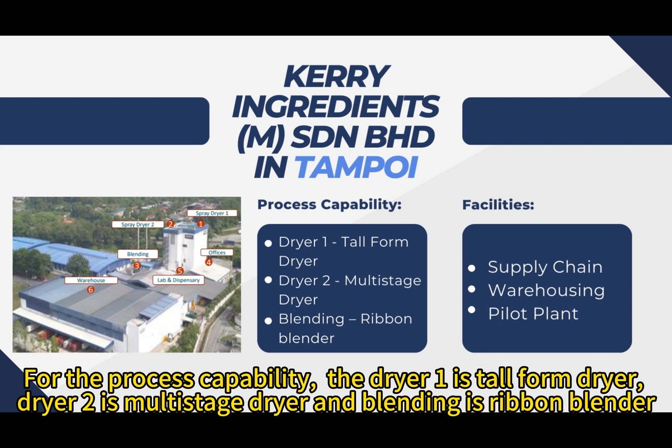For Kerry Ingredients M Sendirian Berhad in Tampoi, there are mainly 6 buildings in this plant: a 40-meter high building containing 2 spray dryers, blending area, offices, lab and dispensing area, and warehouse. For process capability, Dryer 1 is a tall form dryer, Dryer 2 is a multi-stage dryer, and the blender is a ribbon blender. The facilities include supply chain, warehousing, and pilot plants.

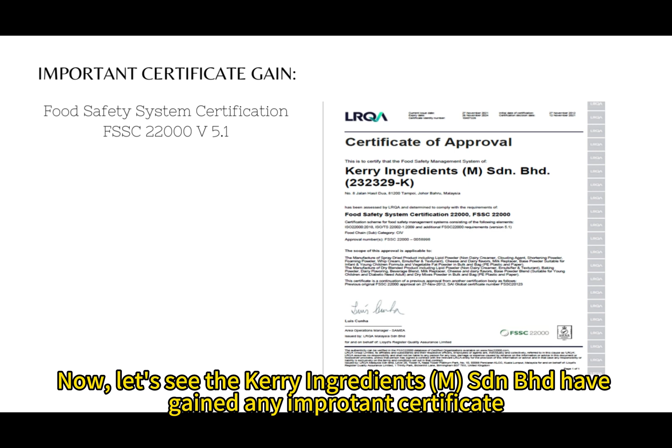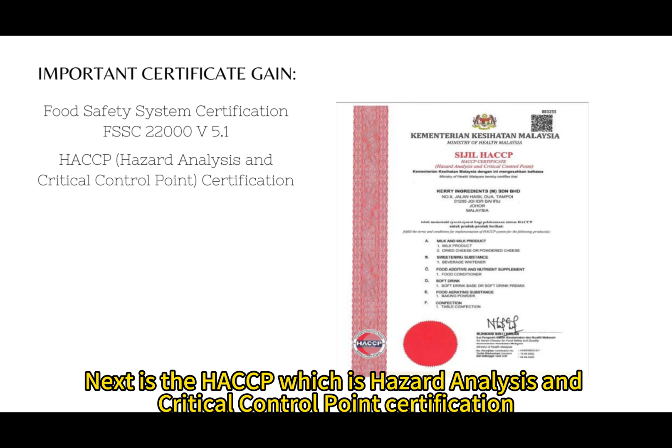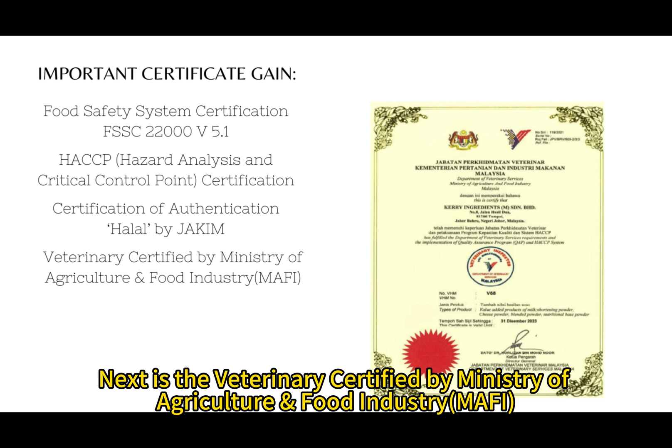Now, let's see what important certificates Kerry Ingredients M Sendirian Berhad has gained. The first is Food Safety System Certification, FSSC 22000 V5.1. Next is HACCP, the Hazard Analysis and Critical Control Point Certification. Third is the Certification of Authentication Halal by JAKIM. Next is the Veterinary Certified by the Ministry of Agriculture and Food Industry, MAFI.

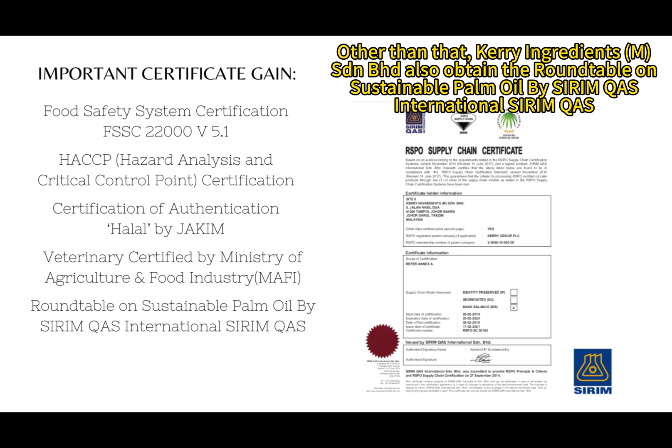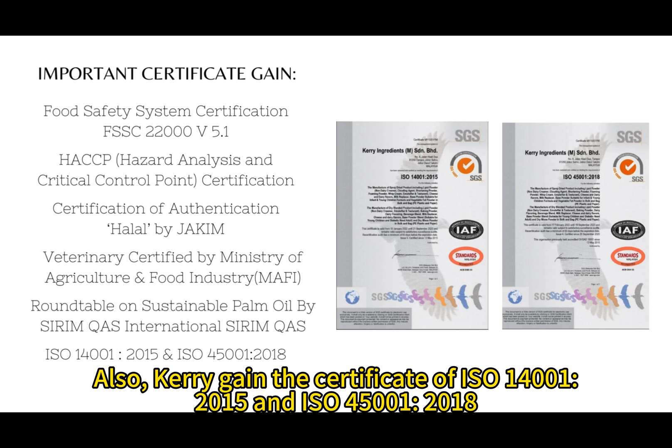Other than that, Kerry Ingredients M Sendirian Berhad also obtained the Round Table on Sustainable Palm Oil certification by SIRIM QAS International. Also, Kerry gained the certificates ISO 14001-2015 and ISO 45001-2018. These certificates are important in the manufacturing of spray dry and dry blended products.

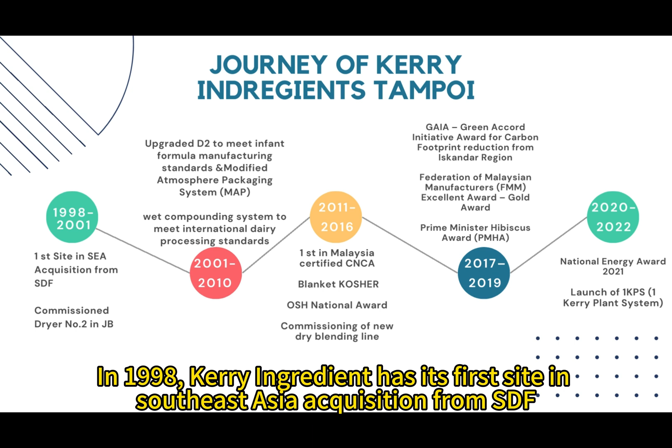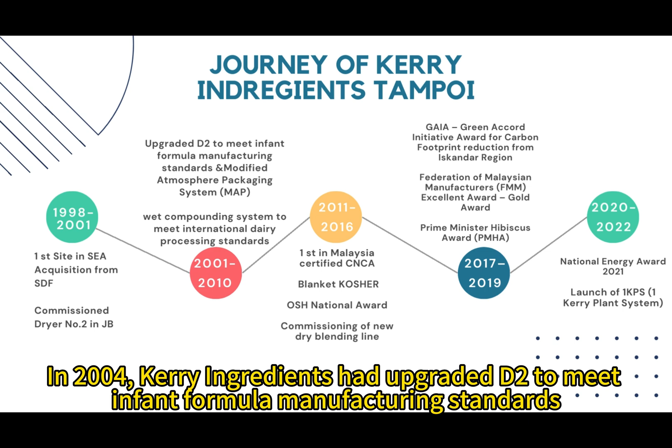So this is the key milestone for Kerry Ingredients. In 1998, Kerry Ingredients had its first site in Southeast Asia acquired from SDF. In 2001, they commissioned Dryer No. 2 in Johor Bahru. In 2004, Kerry Ingredients upgraded D2 to meet infant formula manufacturing standards, and added the Modified Atmosphere Packaging System (MAP) in 2010.

In 2008, they upgraded the wet compounding system to meet international dairy processing standards. In 2014, Kerry Ingredients was awarded the OSH National Award. In 2016, they commissioned a new dry blending line. In 2017, Kerry Ingredients was awarded the Prime Minister's Hibiscus Award (PMHA).

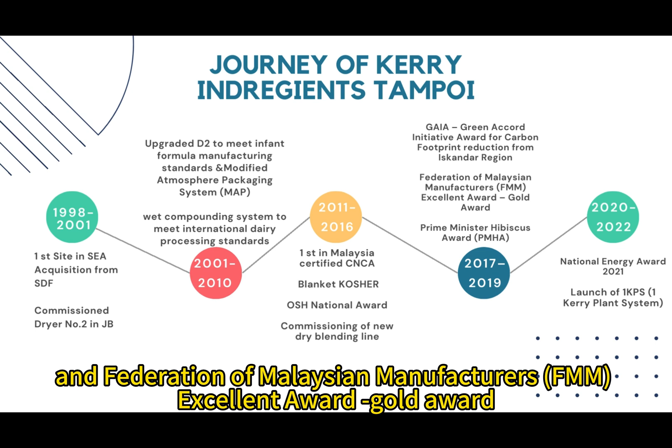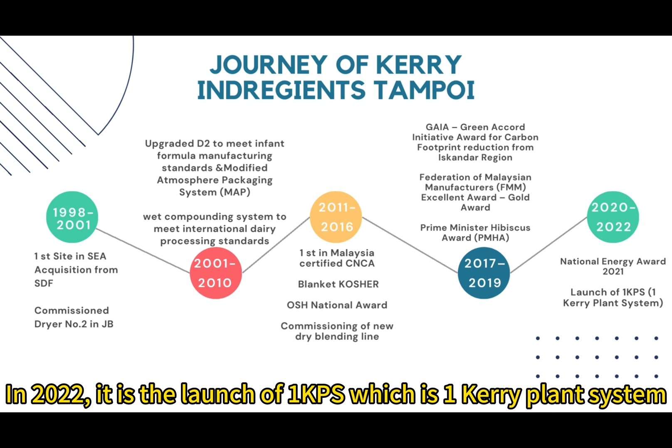In 2019, they were awarded the GAIA Green Accord Initiative Award for Carbon Footprint Reduction from the Iskandar Region, and the Federation of Malaysian Manufacturers (FMM) Excellent Award Gold Award. In 2021, they were awarded the National Energy Award 2021. In 2022, it is the launch of 1KPS, which is One Kerry Plant System.

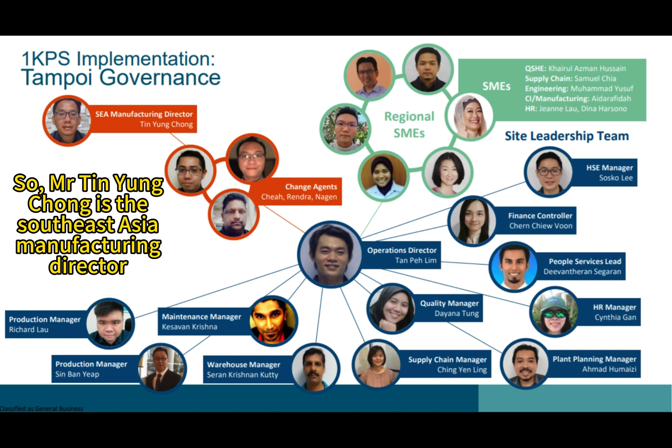Next, we have the One Kerry Plant System Implementation Tampoi Governance. Mr. Tin Yung Chong is the Southeast Asia Manufacturing Director, followed by change agents Cheah, Rendra, and Nagen. There are site leadership teams under the Operations Director, Mr. Tan Peh Lim. It also has the Regional Small and Medium Enterprises, SMEs.

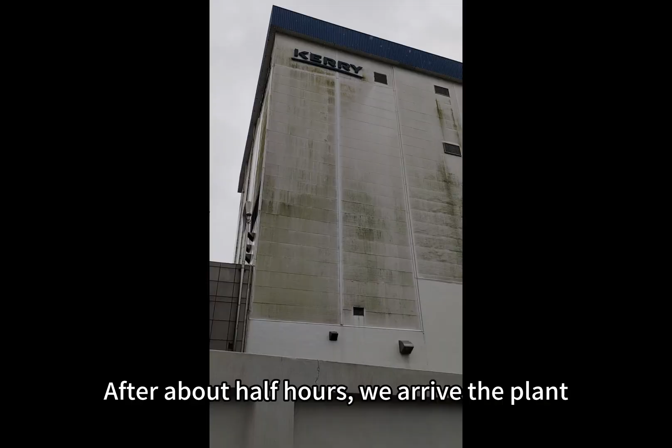In the morning, we gather at L01 and go to the plant by bus. After about half an hour, we arrive at the plant. Then we are brought to the guest room and listen to the explanation.

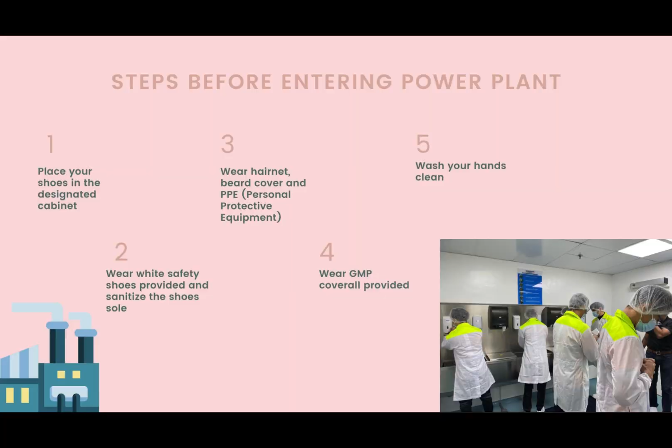The Health and Safety Executive Manager, Mr. Sosko Lee, gives us an explanation about the safety information in the plant. Then the Production Manager, Richard Lau, gives us a brief explanation about the plant. Then we are separated into a few groups.

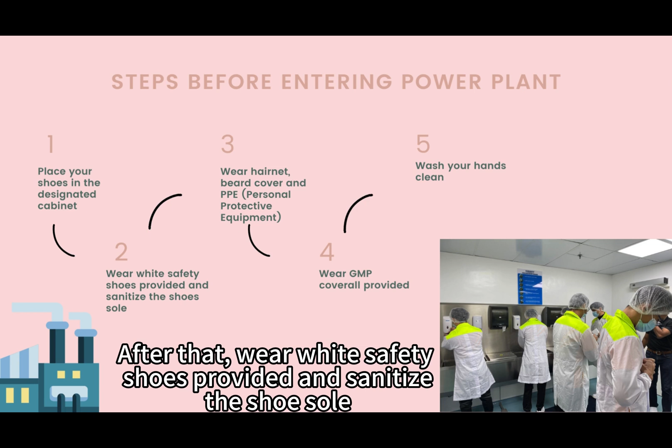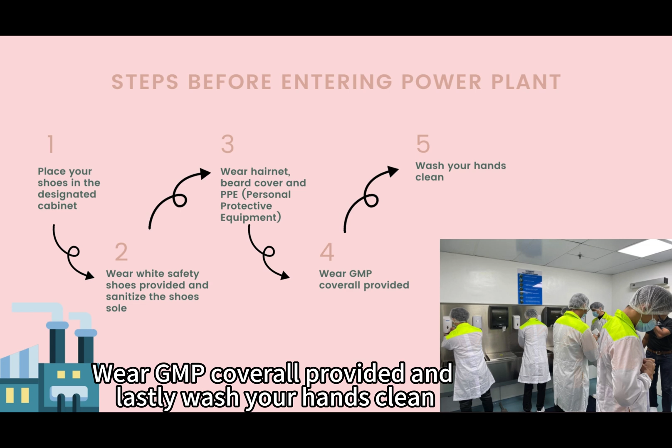There are a few steps before entering the plant. First of all, place your shoes in the designated cabinet. After that, wear the safety shoes provided and sanitize the shoe sole. Wear a hairnet, beard cover, and PPE. Wear the GMP coverall provided. And lastly, wash your hands clean.

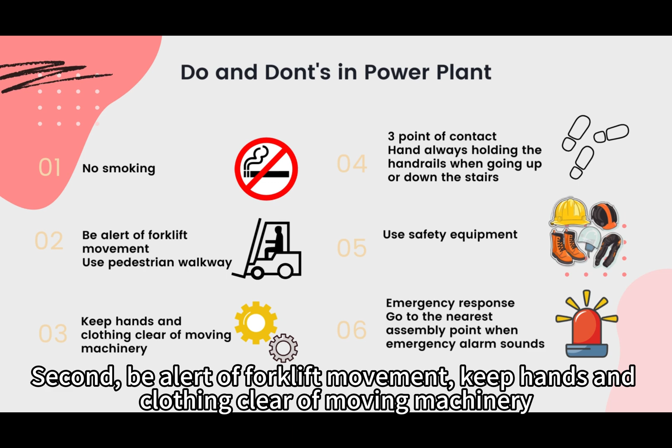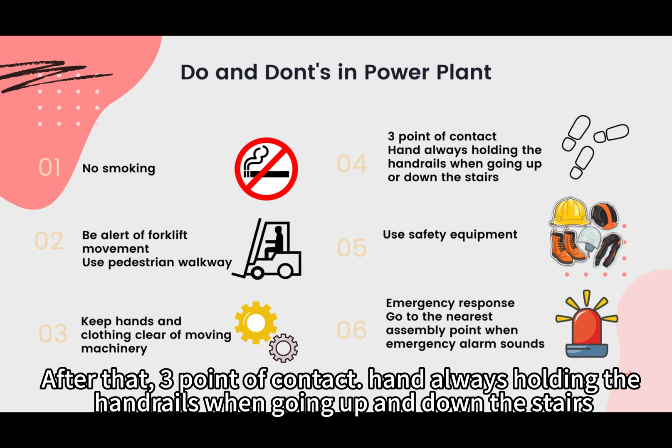After that, maintain 3 points of contact - hands always holding the handrails when going up and down the stairs. Use safety equipment. Lastly is emergency response: go to the nearest assembly point when the emergency alarm sounds.

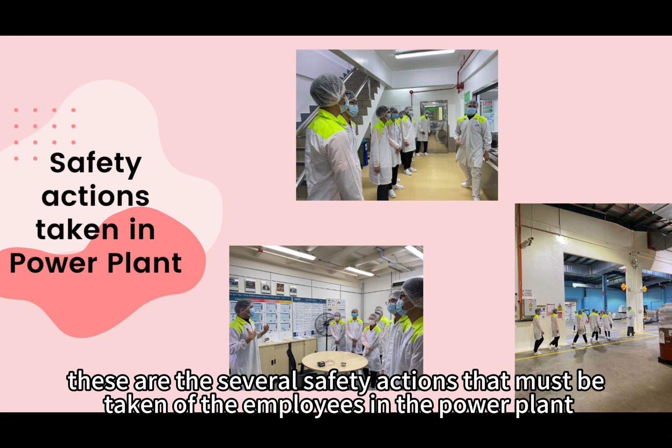Alright, so these are some photos taken in the plant, showing several safety actions that must be taken by employees in the plant. Next, we move on to the overview of the production process flow and products.

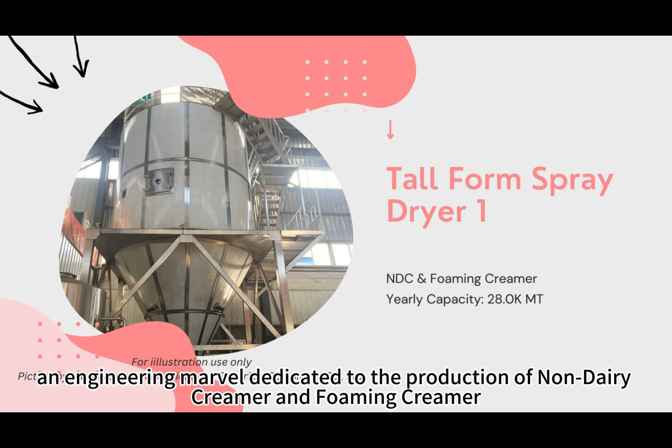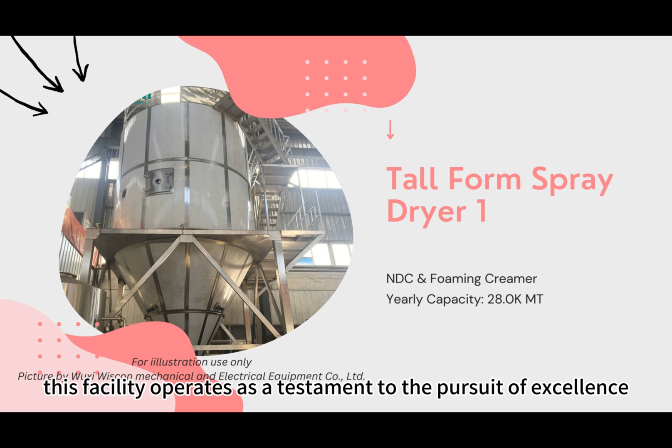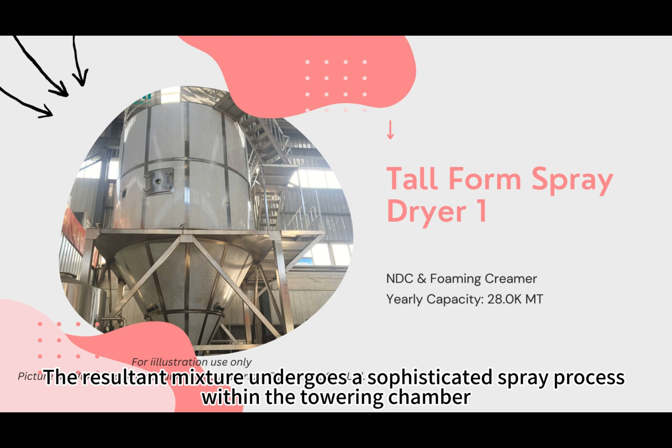Our exploration begins in the spray dryer plant, a realm of precision engineering and scientific mastery. Here we find the tall form spray dryer, an engineering marvel dedicated to the production of non-dairy creamers and foaming creamers. With an annual capacity of 28,000 metric tons, these facilities operate as a testament to the pursuit of excellence. The process commences with the meticulous selection and blending of specific ingredients. The resultant mixture undergoes a sophisticated spray process within the towering chamber, yielding fine powder particles. These methods ensure unparalleled quality and consistency across our product range.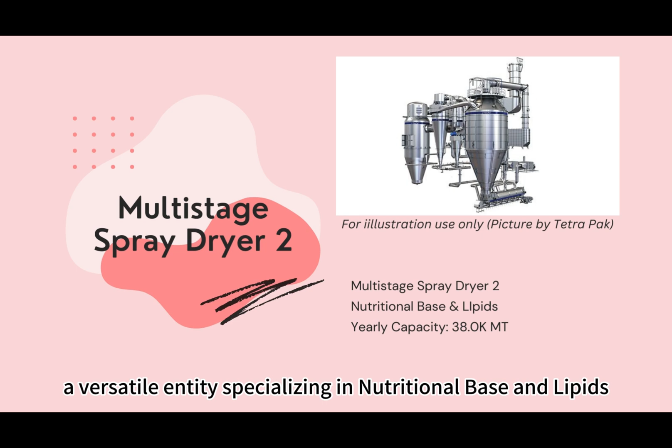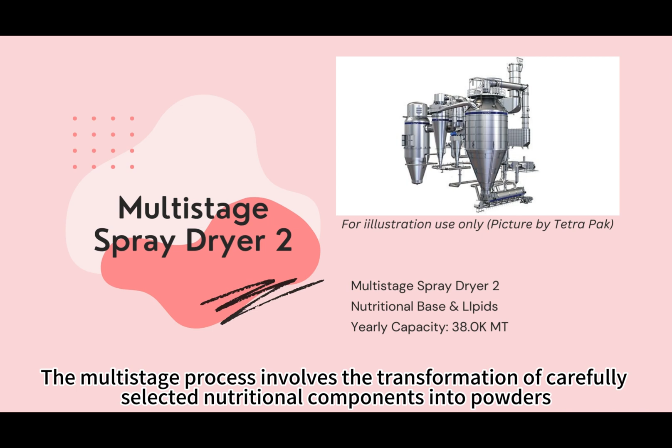Progressing further, we encounter the multi-stage spray dryer two, a versatile entity specializing in nutritional base and lipids. Boasting a yearly capacity of 38,000 metric tons, it stands as a cornerstone in our commitment to delivering nutritionally superior ingredients. The multi-stage process involves the transformation of carefully selected nutritional components into powders, serving as the foundation for a diverse array of applications ranging from health supplements to fortified food products.

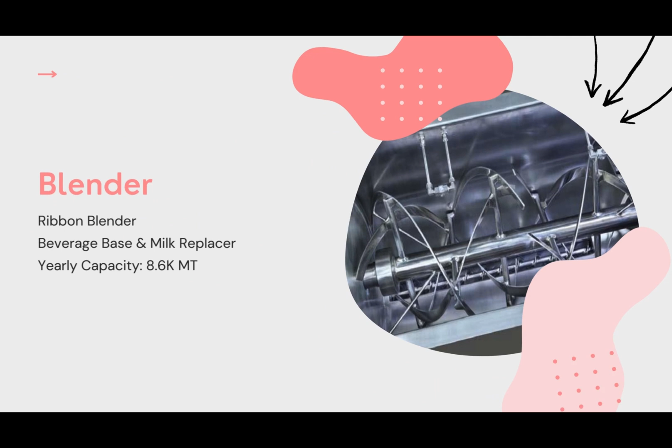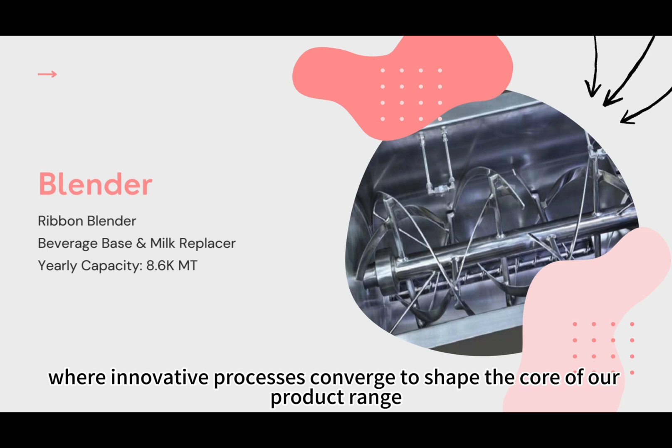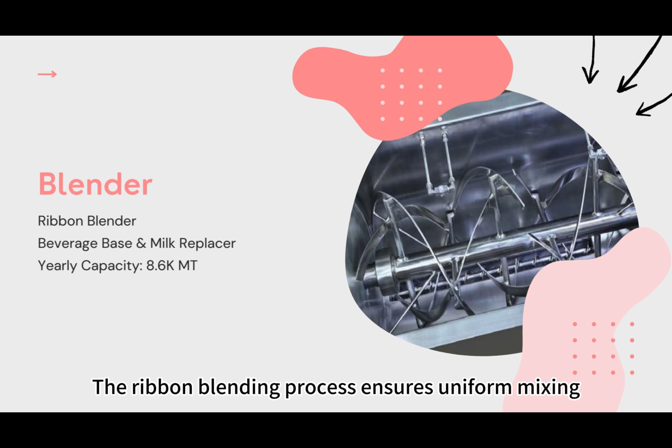Our education odyssey extends to the blender plants, where innovative processes converge to shape the core of our product range. Here, the ribbon blender takes center stage, orchestrating the harmonious blend of beverage bases and milk replacers. With an annual capacity of 8,600 metric tons, these facilities epitomize precision in formulation. The ribbon blending process ensures uniform mixing, producing a homogeneous blend that serves as the cornerstone for a diverse range of beverage and dairy products.

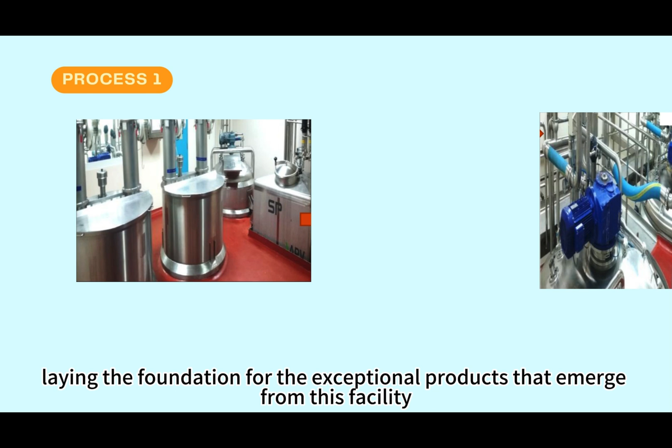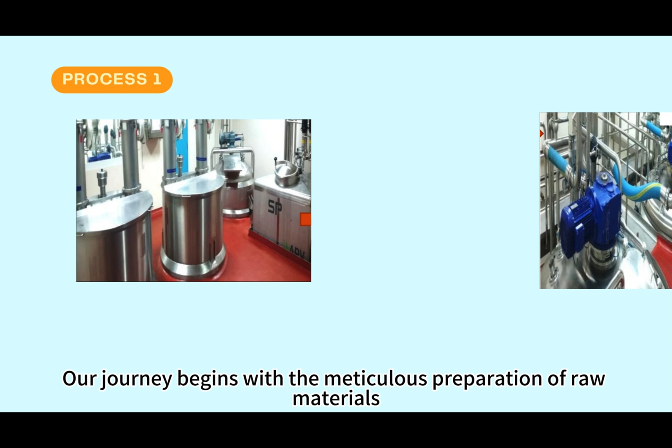In this segment, we dive into the intricate process of spray drying and carrier ingredients. These crucial methods transform liquid into fine powder, laying the foundation for the exceptional products that emerge from this facility. Process one begins with the meticulous preparation of raw materials. In the staging and dispensary areas, each ingredient undergoes thorough quality control verification to ensure the highest standards are maintained.

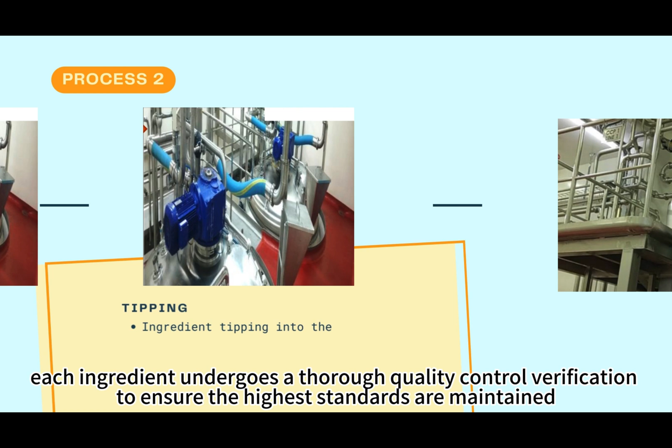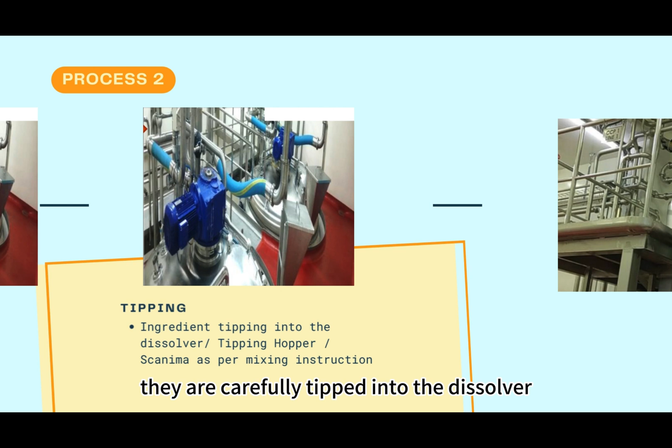Process two begins once the ingredients are meticulously measured and verified. They are carefully tipped into the dissolver, tipping hopper or Scanima, following precise mixing instructions.

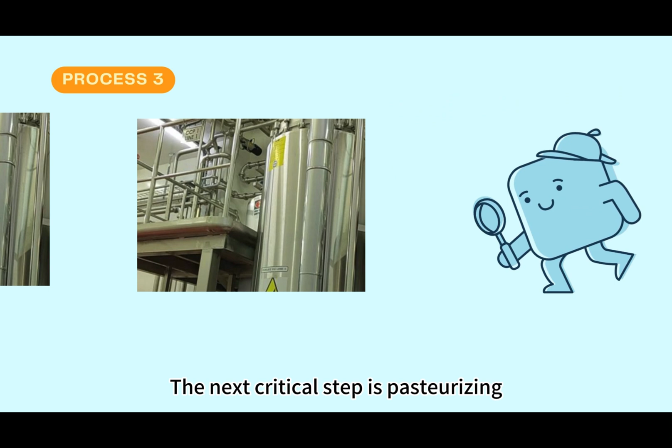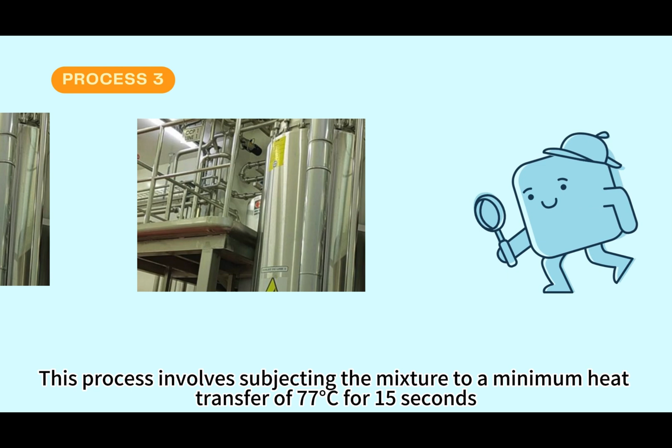Process three is pasteurizing, marked as critical control point 1. This process involves subjecting the mixture to a minimum heat transfer of 77 degrees Celsius for 15 seconds, ensuring the highest standard of hygiene and safety.

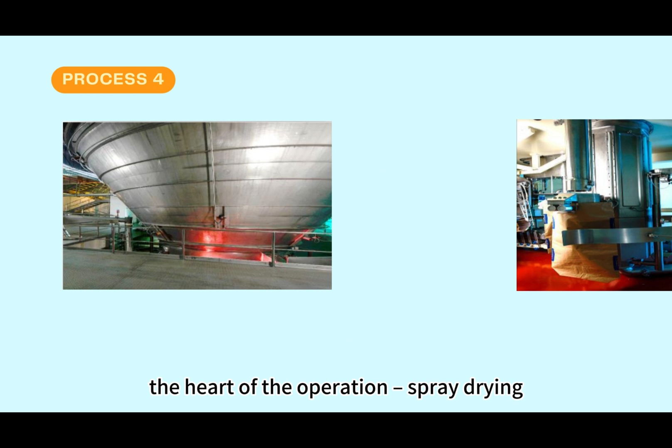Process four is the heart of the operation: spray drying. This process involves dewatering the mixture, transforming it from liquid form to fine powder that retains the essence of the original ingredients.

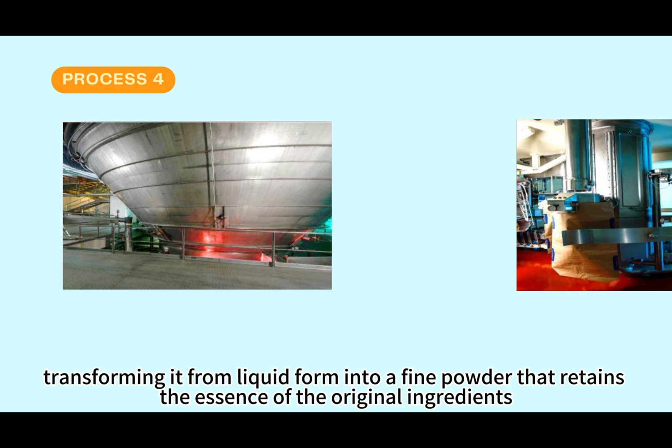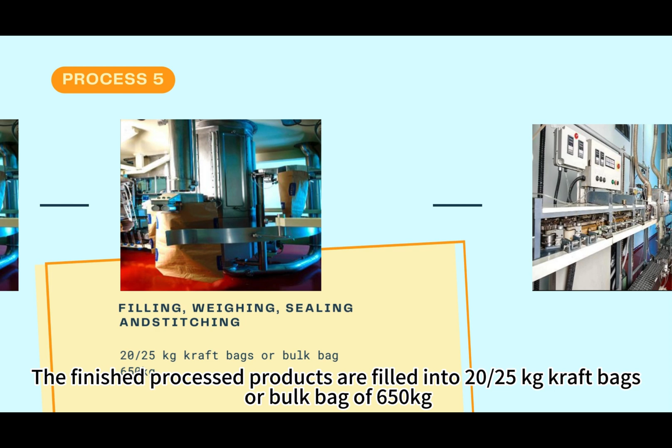Now let's go on to step 5, which is filling, weighing, sealing, and stitching. The finished processed products are filled into 20 or 25 kg kraft bags or bulk bags of 650 kg.

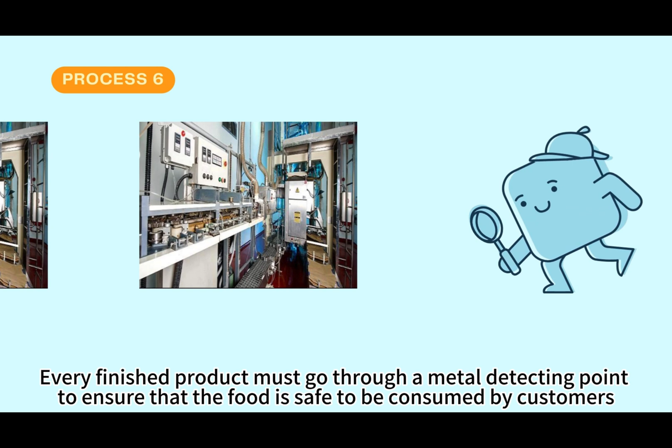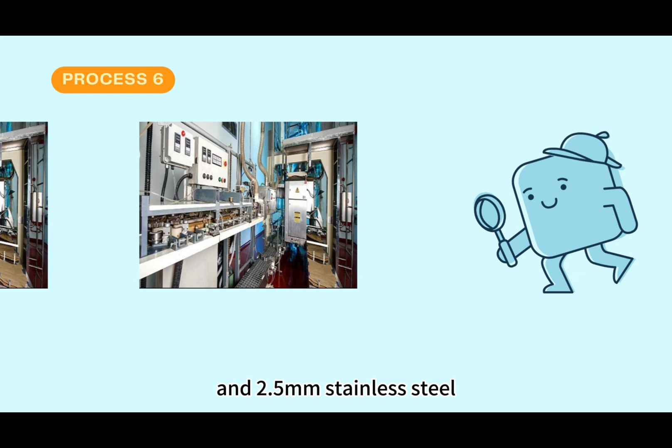This is a crucial part of the production line: metal detecting. Every finished product must go through a metal detecting point to ensure that the food is safe to be consumed by customers. The critical limit of a metal detector is 2 mm Fe, 2.5 mm non-Fe, and 2.5 mm stainless steel, with a secondary standard of 1.8 mm Fe, 2.5 mm non-Fe, and 2.5 mm stainless steel.

Next is weight check weighing. The weight of each item is checked to guarantee that the product produced is perfectly aligned with industry standards.

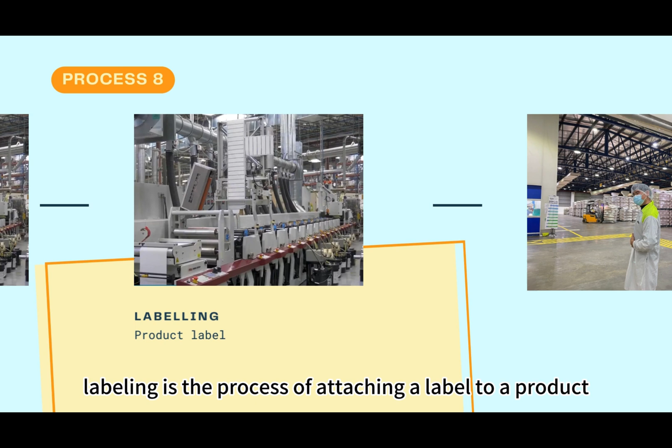Process 8 is labeling. Labeling is the process of attaching a label to a product, providing essential information about it, for example expiry date, ingredients, nutritional facts, and identification marks.

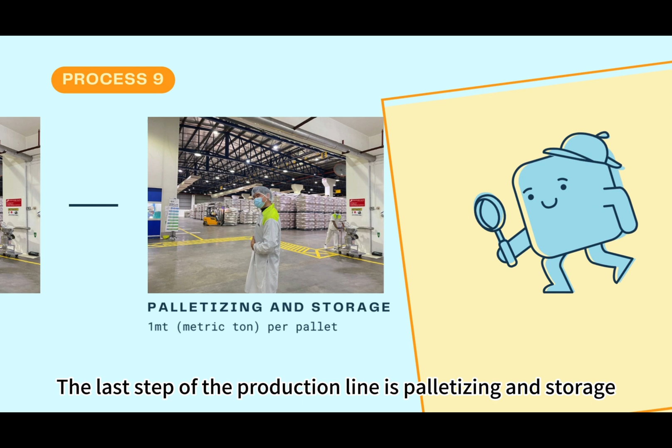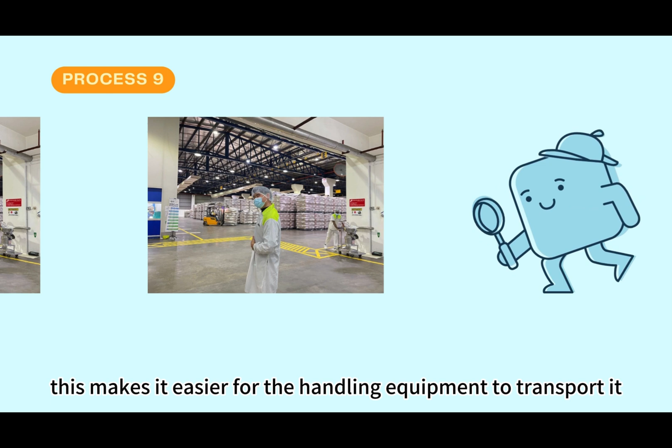The last step of the production line is palletizing and storage. After the products go through all the quality control processes, the goods are placed together on top of a pallet. Each pallet consists of 1 metric ton. Doing this makes it easier for the handling equipment to transport it. After that, the pallets are sent to the warehouse for storage.

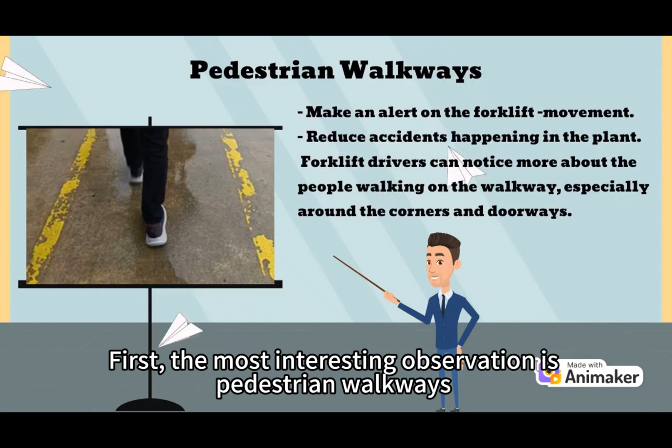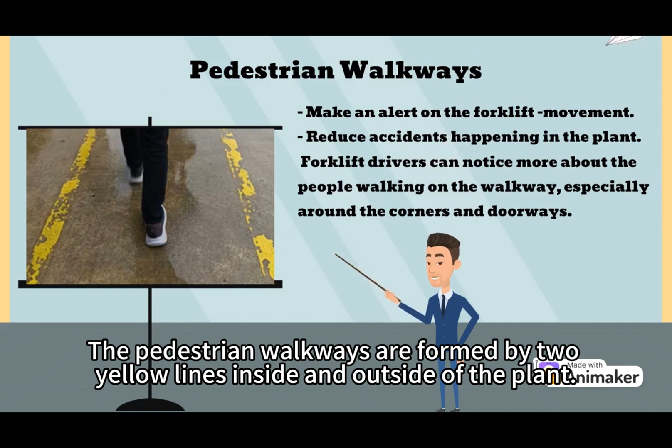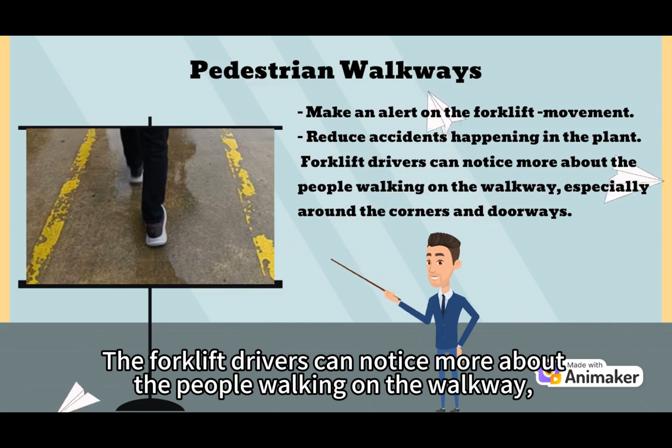What are the observations and learning from this industry visit? First, the most interesting observation is the pedestrian walkways, which is their method to reduce accidents happening in the plant. The pedestrian walkways are formed by 2 yellow lines inside and outside of the plant. Both employees and visitors have to make sure to be inside the walkway when they are walking around. The purpose of this is to make an alert on forklift movement, so the forklift drivers can notice more about the people walking on the walkway, especially around the corners and doorways.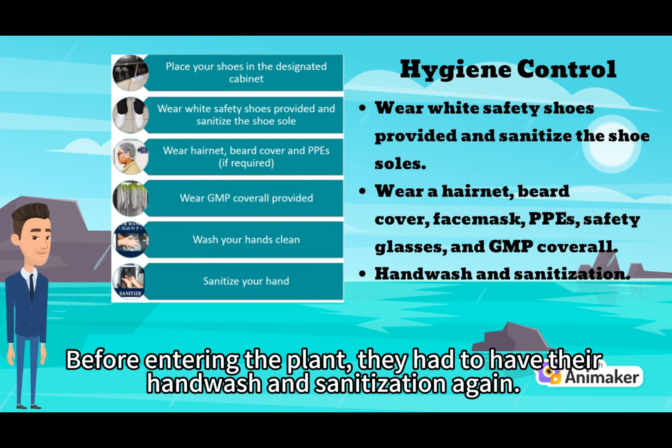Another best observation of the plant is its hygiene control. Workers and visitors had to wear the white safety shoes provided and sanitize the shoe soles with a specific washing machine for 10 seconds. They also have to wear a hairnet, beard cover, face mask, PPEs, safety glasses, and GMP coverall. Before entering the plant, they had to wash and sanitize their hands again.

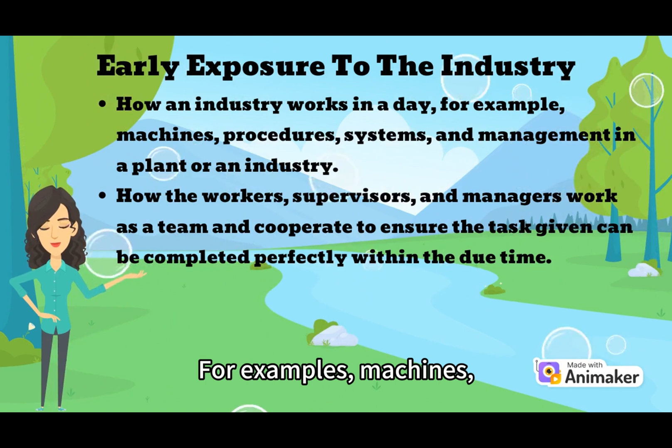Last is the experience learned from the industry visit. First, we learn about early exposure to the industry, such as how an industry works in a day, for example machines, procedures, systems, and management in a plant or an industry. We also learn about how the workers, supervisors, and managers work as a team and cooperate to ensure the task given can be completed perfectly within the due time.

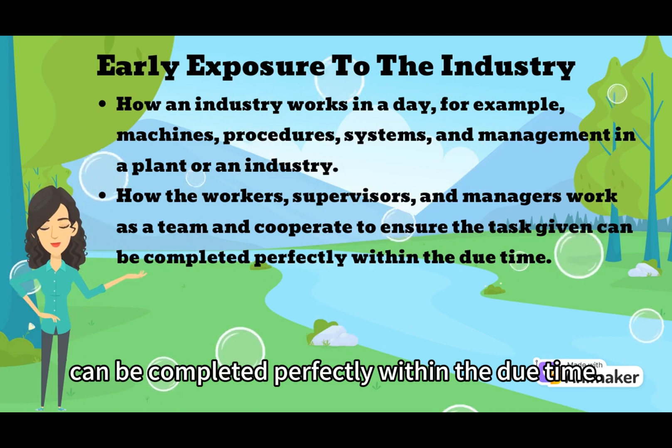Then we also learn about the importance of technology, such as only having to control the machines and monitor the process through the computer. By using these technologies, not only is time and energy saved, but it is also more precise and reduces the risk of accidents happening.

Last but not least, we learn the importance of food safety, for example the guidelines and hygiene control in plants. This relates to the safety and health of the users, but also represents the reputation of a company. If the reputation of a company is good, production might increase due to the satisfaction of the users.